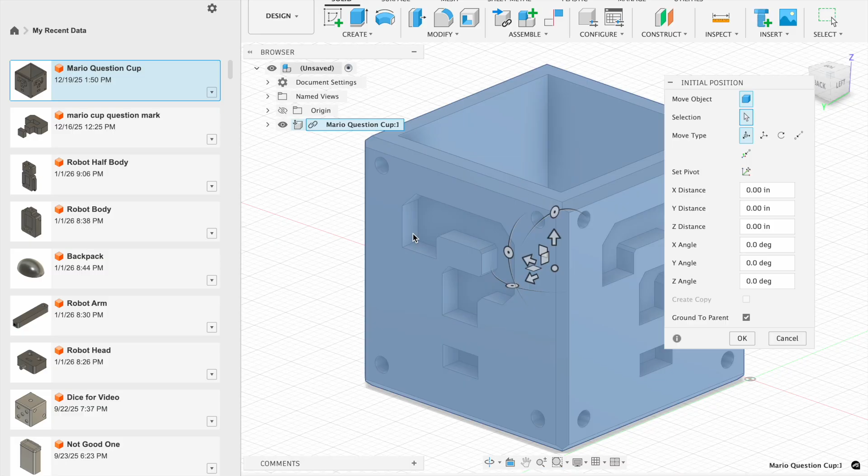Now I'm going to right click this and insert into current design. You might be able to drag that in—that's fine too, it doesn't matter. You press enter if you don't want to move it, and I don't want to move that.

Now I'm going to right click this, and I'm going to click insert into current design. And now I'm actually going to rotate this.

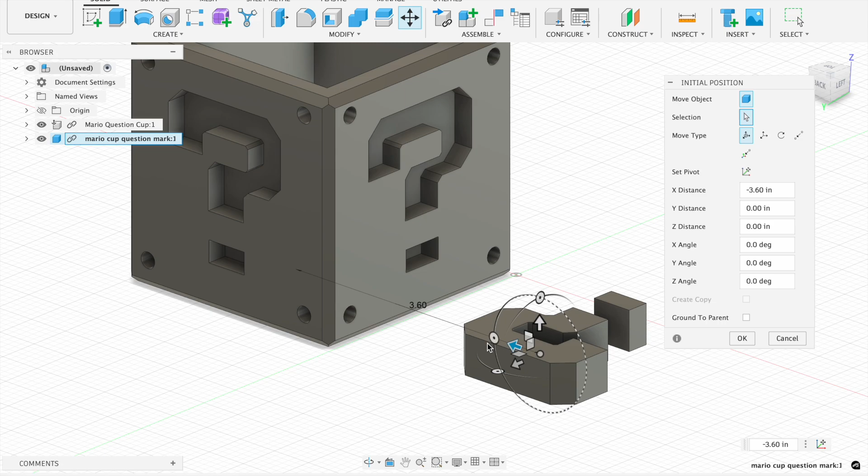There's a couple of ways to rotate this. You could leave it like this and then move it, or you can just rotate it from the jump. So I'm going to rotate it from the jump, by 90 degrees.

This will help me with my snap points, which I'll explain in a little bit in the video, or actually probably right about now.

Now, to insert a joint, or specifically a rigid joint, in Fusion, it's the same process. Fun fact, a rigid joint is just a type of joint, so inserting a joint in Fusion is the same exact step and method as a rigid joint. It's just a little bit nuanced with the specific types of joints. But all joints have the same starting process.

Basically, inserting any type of joint in Fusion all has the same setup. They just might have a little bit of different nuances per the different joints, which is why I have different videos. Now, if you do not know how to insert a component or what a component is in Fusion, I will have a video linked below going over that in more detail, because it's really important that you understand components for understanding how to use joints in Fusion.

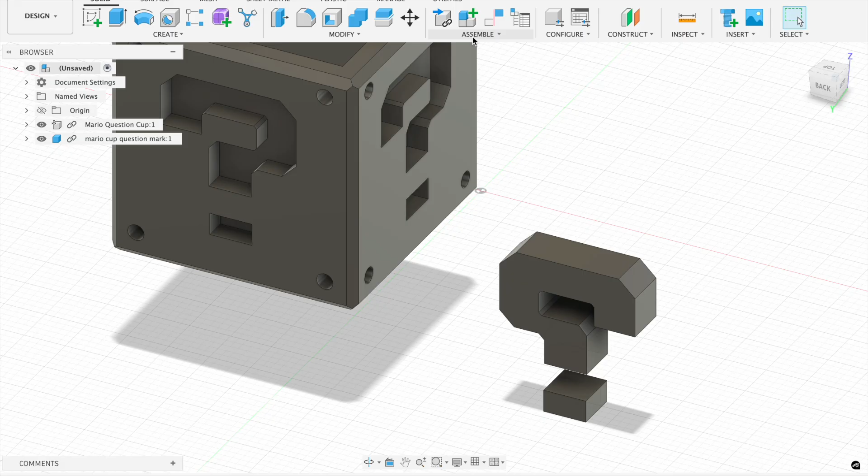All right, enough of that—let's go into actually how to do this. So you're going to click assemble, you're going to click joint, and you're going to find the snap points.

A snap point is basically where things in your model connect. So if I want my snap point to be here and here, I'm going to click those, because that is where they will touch and, for a rigid joint, be glued together in the model.

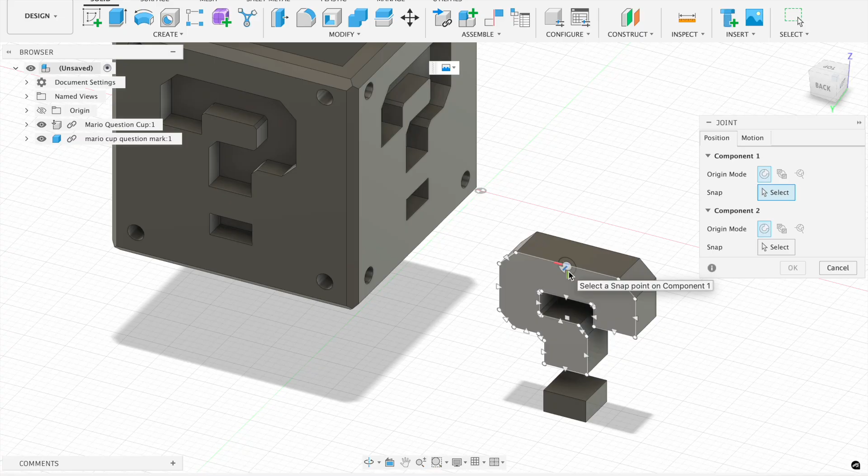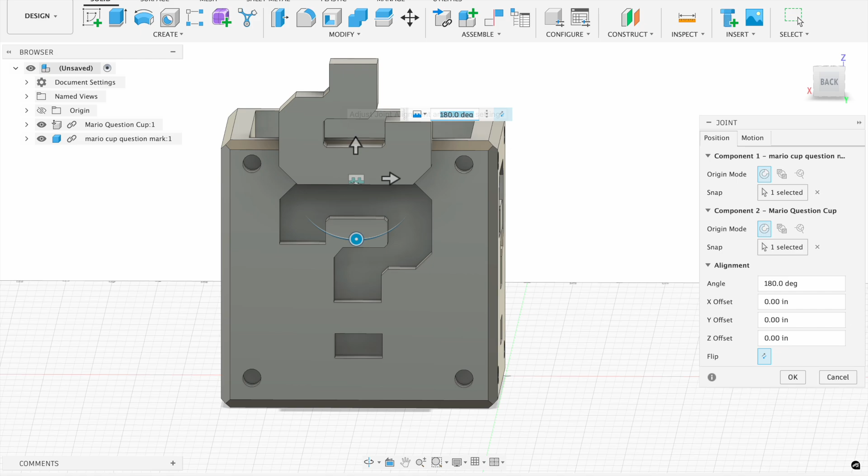Okay, so I'm going to click here, and now I'm going to click. I have to be very, very careful with this because this has been really annoying before. I'm going to click right there. I see that it's rotated really wonky, so I'm going to fix it.

Now I actually already have a rigid joint here, and the reason I know that is because of this symbol. Each joint in Fusion has a specific symbol—so for a rigid joint, it looks like that.

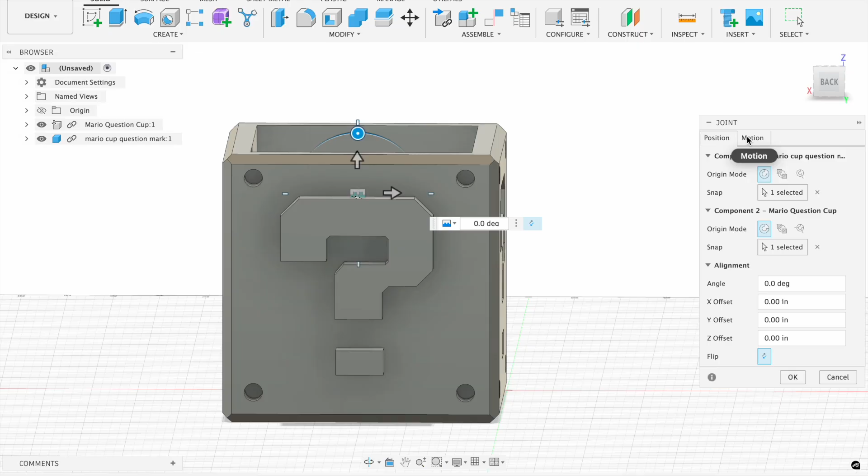To double check that, all you have to do is go to motion. So you have position, and then you have motion here. Once again, all joints have the same setup—specific joints just have specific nuances to them, which is why there are separate videos on them.

So for the type, I want rigid, so I'm going to click rigid. But if I wanted revolute, I would click revolute. This video is specifically for rigid.

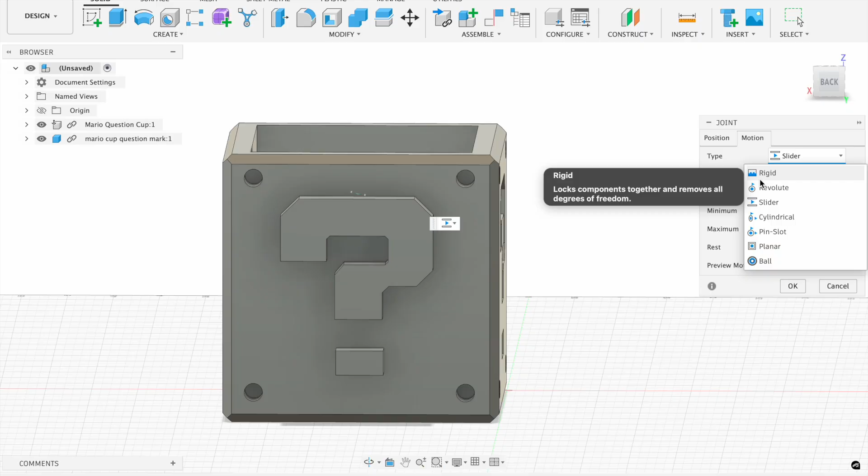Same thing for slider, I would go to slider. Notice how each joint has its own little icon. That's really important to understand, because it gives you a cheat sheet as to which joint you're looking at. If I click it here, it changes to right here.

Essentially, if it's not on the rigid joint, you simply go to motion and click rigid. So let's say I was on revolute for whatever reason. You go to motion, click type, and click rigid. Or you can go right here, and let's say it's on slider. You click right here, you click rigid.

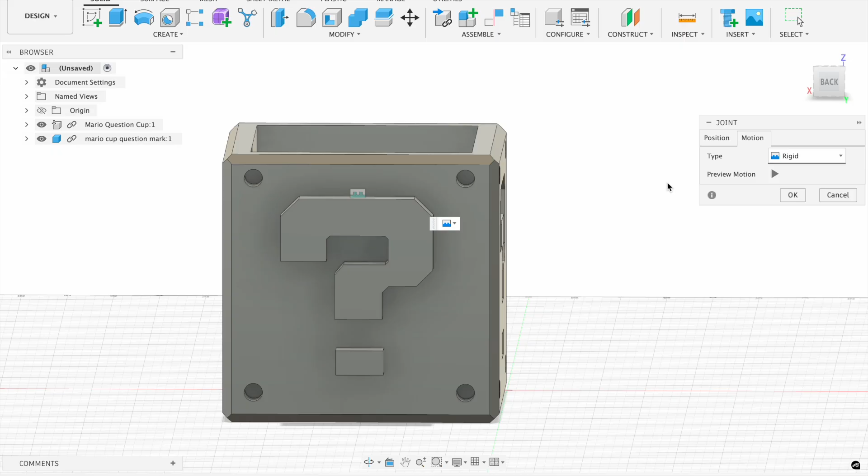These talk to each other and they're going to match up, and it's whichever way works best for you. My position is, I think, perfect, but if I didn't like it, I could always tweak it, make it go in or out. That's where you go to position to edit, using these arrows and rotational ball things to fix it. That's how you add a rigid joint in Fusion.

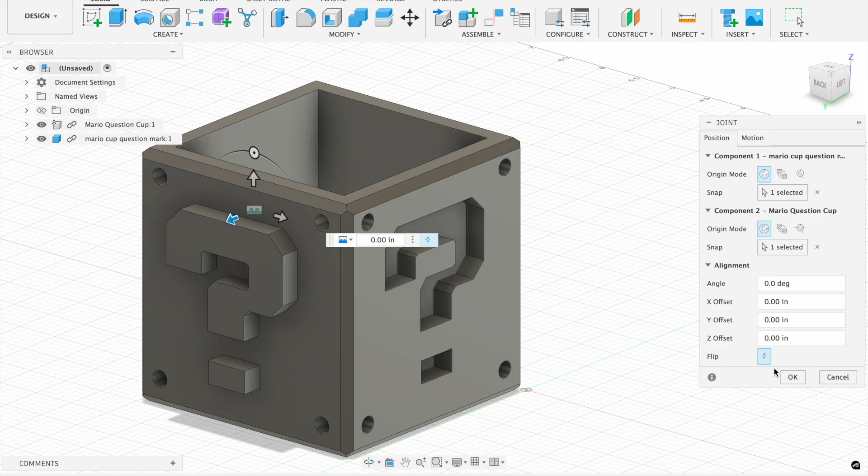You'll notice in a lot of my other joint videos that the setup for all of these joints is the same, because all you do is go to assemble, joint, and work on the joint. When you're done, you click OK. Let me show that process again in case you didn't see it clearly.

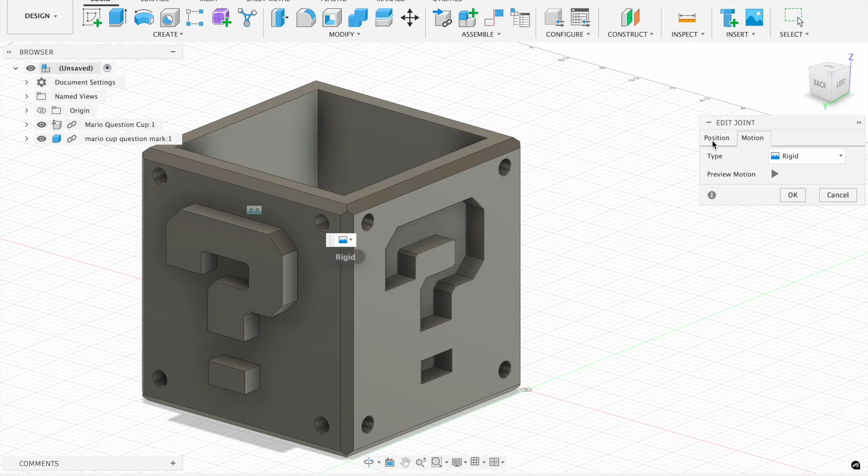I'm going to click edit joint in my timeline. I make sure everything's nice and the way I want it. So I have the rigid joint, I can tell by the icon right here. I click OK because I'm done, and I'm done. That's how you add a rigid joint in Fusion.

I'm actually going to do that again for practice, in case y'all are confused or got lost in my explanation. So let me do that one more time.

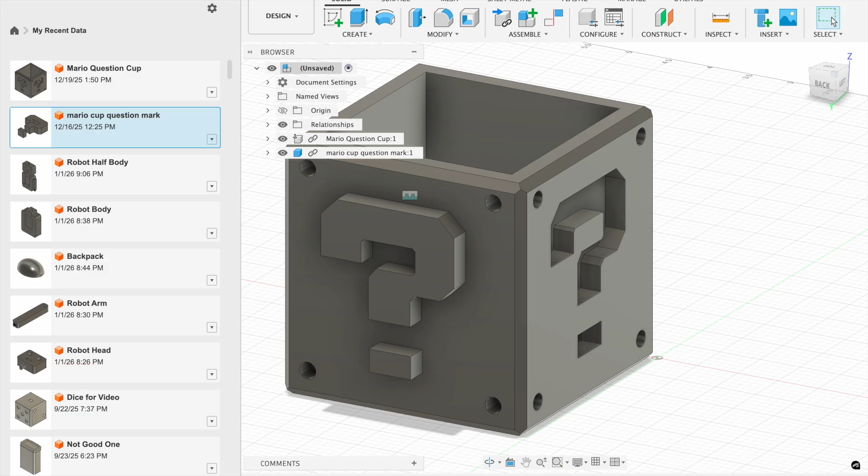So I go to the upper left-hand corner, I click Show Data Panel, I right-click Insert into Current Design. I drag this over, I click X because I don't need that thing. I click, and I'm going to rotate this 90 degrees.

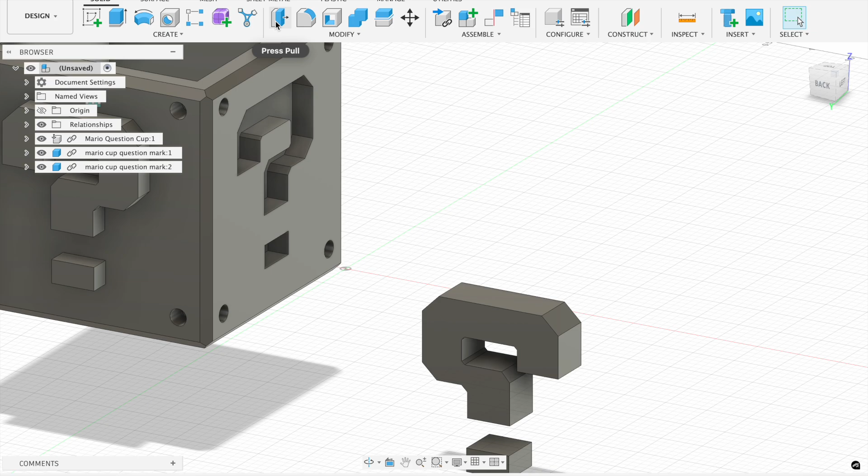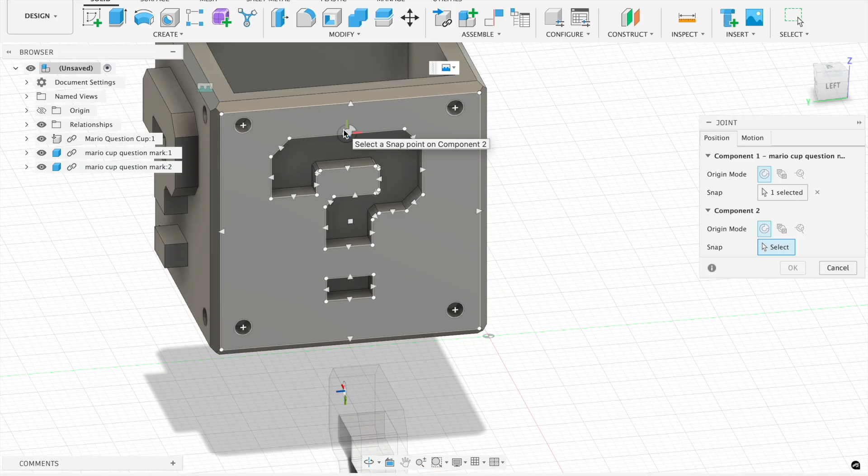Now I'm going to click Assemble, click Joint. I'm going to click this back face right here because I want it on a specific part of my model. And then I'm going to do this. I'm going to snap this piece of my component.

I know it's a rigid joint because of this, but if I wanted to go to motion, I can click Type, Motion, and change the motion. But for this, I'm going to click rigid because I want a rigid joint.

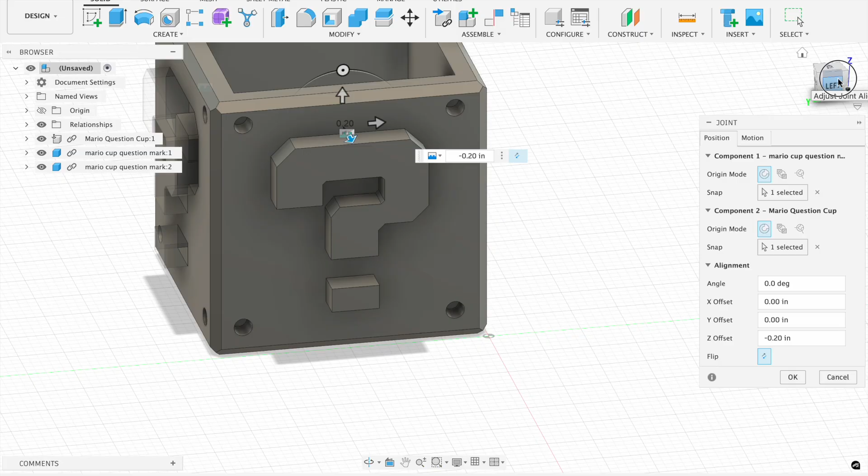I'm going to go to position, and move it in to where I want it to be. And there I go. I have my rigid joint, as proven by this symbol here confirming it's a rigid joint, and the words below confirming it too. I click OK because I'm done. And there I have it, I have a rigid joint.

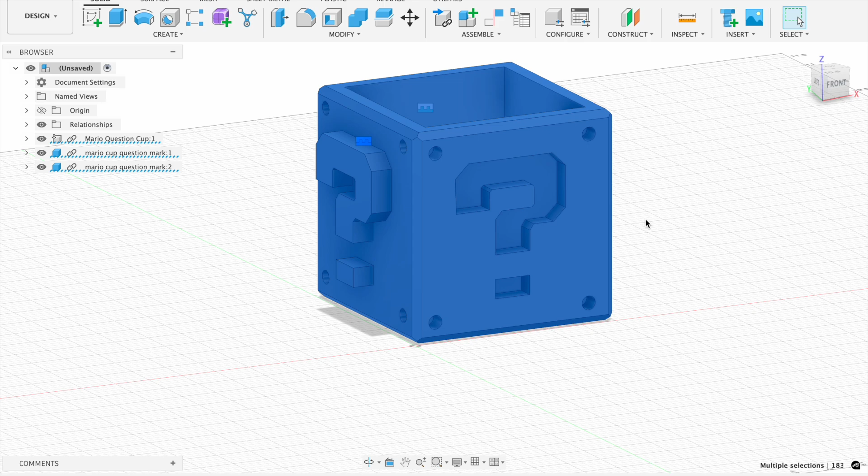Total side note, this was a gift for someone in my family that I made. I'm not affiliated with Nintendo or Mario, I was simply trying to make this for my family member. I do not have a video on how to make this, and there will not be one, because this took a long time and I probably couldn't do it justice explaining it — it was a very tedious process. But that's a side note.

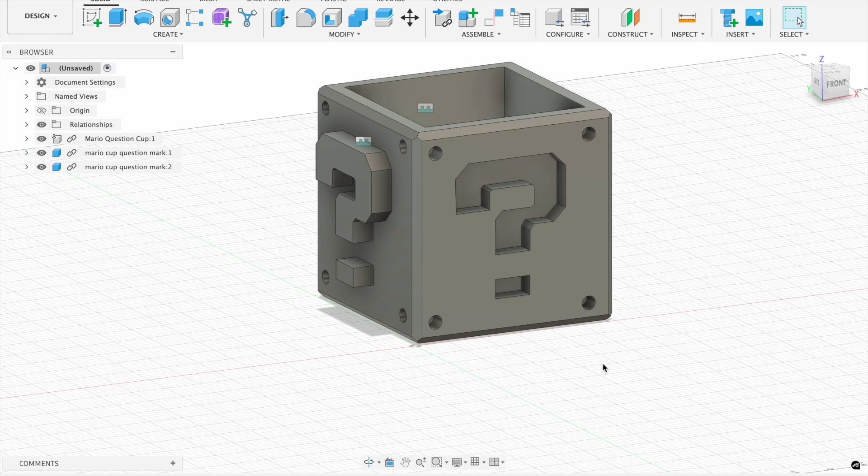Anyways, that's how to use the rigid joint in Fusion. That was another STEM with Miss Dubois video where we learn how to use the rigid joint in Fusion.